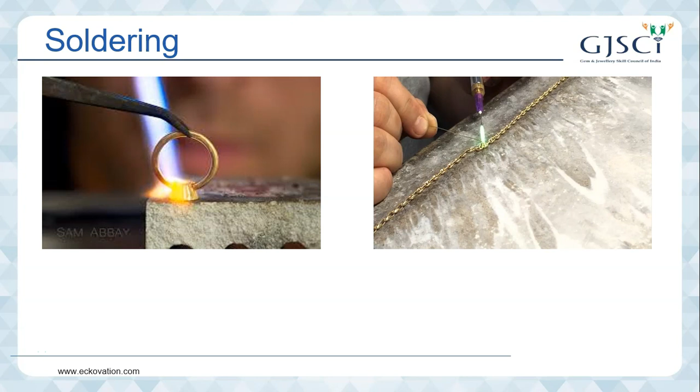Now moving forward, most jewelry is composed of several components that are joined and assembled by soldering. The joining of two pieces of metal by brazing, since high temperature is necessary, is commonly known as soldering in jewelry. In engineering terms, carat gold solders for jewelry are hard solders or brazing alloys, as they melt over 450 degrees Celsius. A requirement of solder is that its melting temperature is at least 20 degrees Celsius below the solidus temperature of the carat gold being soldered. The parent metal does not melt during soldering.

Now, what is the difference between soldering and brazing? Soldering and brazing are both metal joining processes used in different joining conditions. These processes are confusing to differentiate because both processes use filler material and are done below critical temperature. The basic and main difference is that soldering is used to make an electrically strong joint between metals, which can withstand all the electric loads, and brazing is used to make a mechanically strong joint which can withstand all the mechanical loads and stresses.

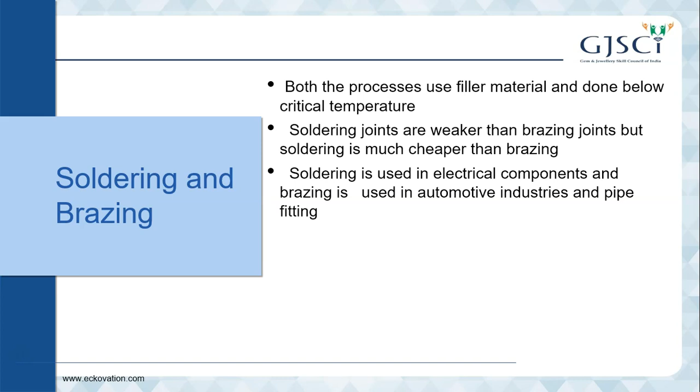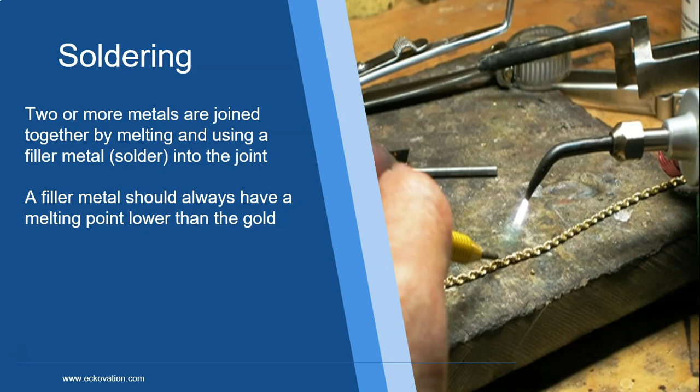Soldering joints are weaker than brazing joints, while soldering is much cheaper than brazing. Soldering is basically used to join electrical components, and brazing is used in automotive industries and pipe fitting. As you know, what is soldering? It is a process where two or more metals are joined together by melting and using a filler metal called solder in the joint. The filler metal should always have a melting point lower than the gold so that the purity of gold is retained when the jewelry is melted.

Cadmium is used as a solder with a ratio of 92% gold and 8% cadmium. This cadmium soldered gold jewelry was known as KDM gold or jewelry. However, the Bureau of Indian Standards has banned this gold from circulation as it is proven to be hazardous to the health of artisans working with it.

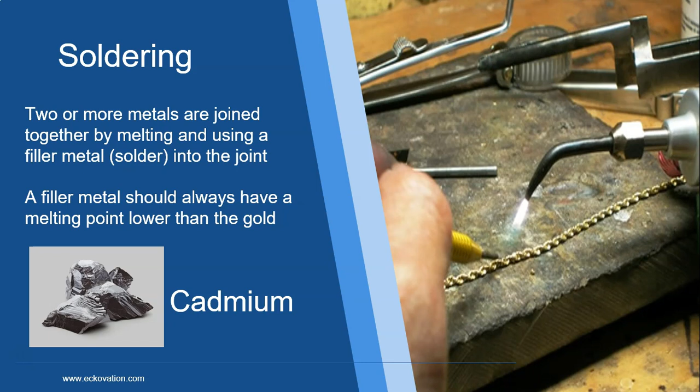Multiple solder joints in a piece of jewelry require multiple types of solder. You don't want to remelt a joint you just soldered while you are soldering another joint. The first joint requires hard solder, the second joint requires medium solder, the third and remaining joints require easy solder. Solder comes in sheet, wire and paste. Sheet solder is cut into paillons, which is a French word meaning little tiny pieces of metal that fly all over the place while you are cutting them.

Paste solder comes in a syringe type applicator and is pre-mixed with a flux. The flux to solder mixture varies depending on how long it's been sitting since it was made. For best results, empty the applicator, mix up the paste thoroughly and put it back into the applicator or in a small lidded glass container. The third one is wire solder. You can flatten it to cut tiny pieces or just cut a piece off the end of the coil.

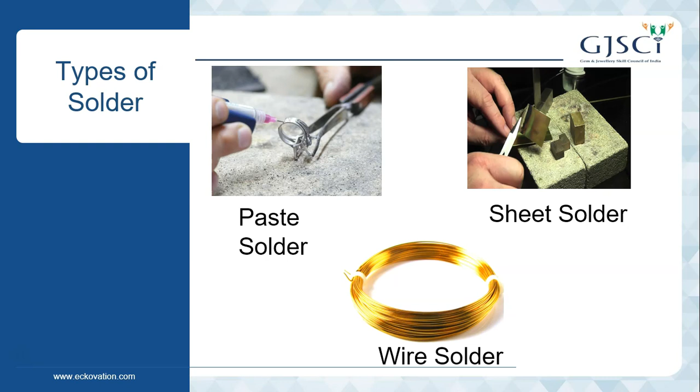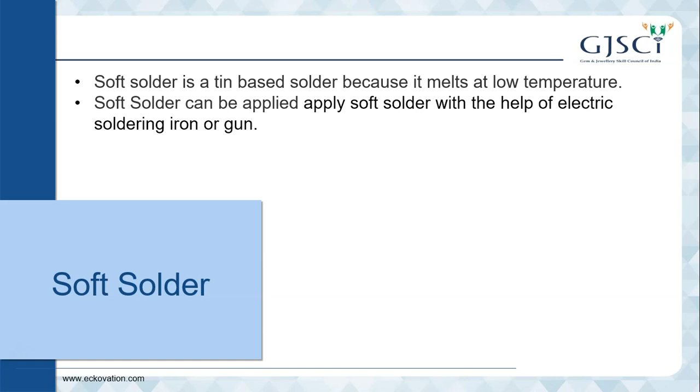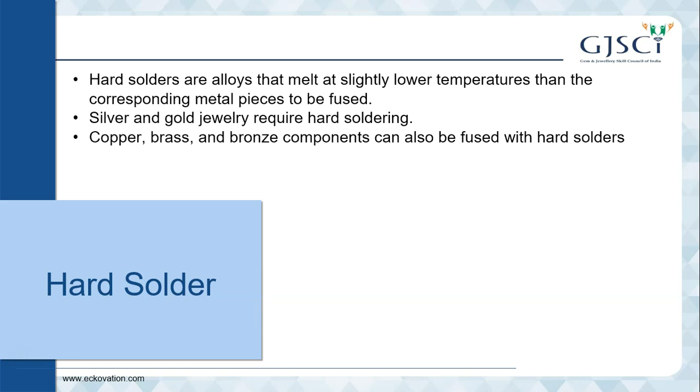Now, what is soft solder? Soft solder is a tin-based solder that melts at lower temperature. You can apply soft solder with an electric soldering iron or gun. What is hard solder? Hard solders are alloys that melt at slightly lower temperature than the corresponding metal pieces to be fused. Silver and gold jewelry require hard soldering. Copper, brass and bronze components can also be fused with hard solders. In addition to requiring flux, hard solders generally also require pickling solutions to clean and remove surface oxidation from the finished piece.

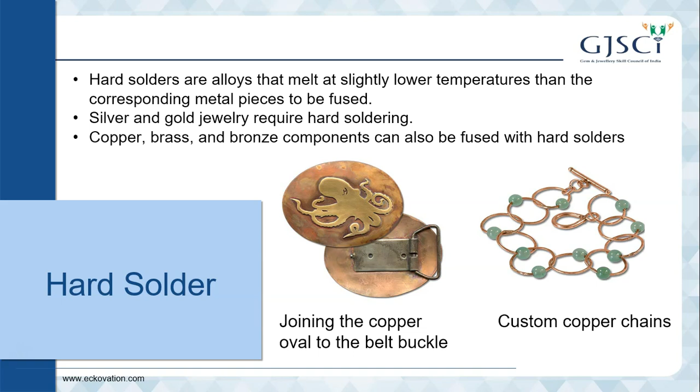The final stage of gold production is refining. It involves removing impurities that remain after the smelting process. Refining companies receive doré bars as well as scrap gold and reliquefy the metal in a furnace. Workers add borax and soda ash to the molten metal, which separates the pure gold from other precious and less precious metals. A sample is then taken to a lab for tests or assays that measure the gold content. In most cases, the gold is 99.9% pure. Workers cast the gold produced during refining into bars.

The two gold refining methods most commonly employed to derive pure gold are the Miller process and the Wohlwill process. Right now, we need to know only the names of these methods and we will discuss these in further videos.

Now, let's see the factors which contribute to maintaining good quality of gold jewelry: purity of gold, purity of alloy, ratio of impurities in the pure gold, types of processes involved, selection of proper raw material for casting and finishing, quality of tools, quality of skilled craftspersons, quality of supervisors, quality of solders, and techniques of assembling and soldering.

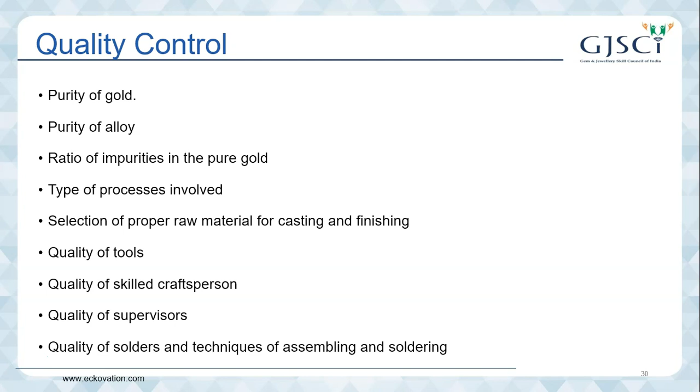Recycling old gold products can be a great way to turn unwanted or damaged jewelry into profit. There are two main methods of refining scrap gold: melting or chemicals. Now, what is gold smelting and gold recovery? Gold smelting is the oldest method for purifying gold by melting it with fire. Gold has a melting point of 1064 degrees centigrade. This makes smelting gold extremely dangerous. Raising the metal to such a high temperature and then processing it risks severe burns.

Special equipment must be used to hold the metal in its liquid form. With the metal in its liquid form, the impurities rise to the top and can be skimmed, leaving purer gold behind. The second way gold is refined is through chemicals, especially a hydrochloric and nitric acid mix known as king's water or royal water. In large-scale mining operations, this used to be done with mercury, and in recent years using cyanide. Both of these chemicals are toxic to humans as well as damaging to the environment, and their use has been reduced. So this is all for this video.

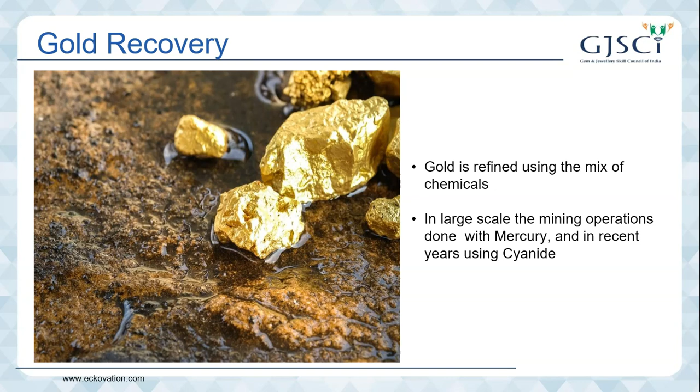In the next video, we will talk about what is assaying and its types.